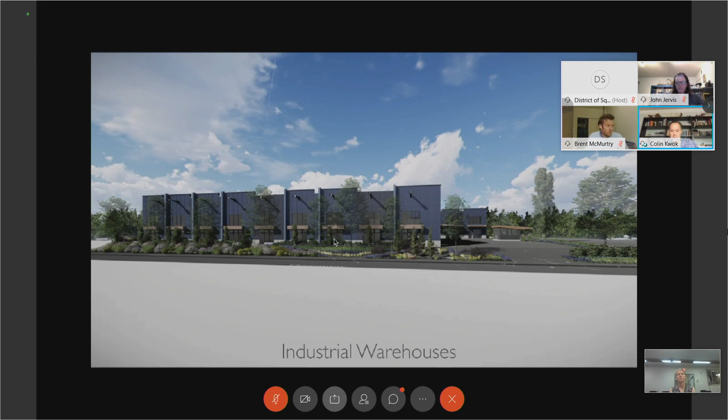So this is the view from the street. We'll come back to this one later, but this is a streetscape showing our building as well as the rest of the street as it is right now.

We have articulated the front facade a little more to give it more relief, and changed up the signage. We will talk about that in a bit too.

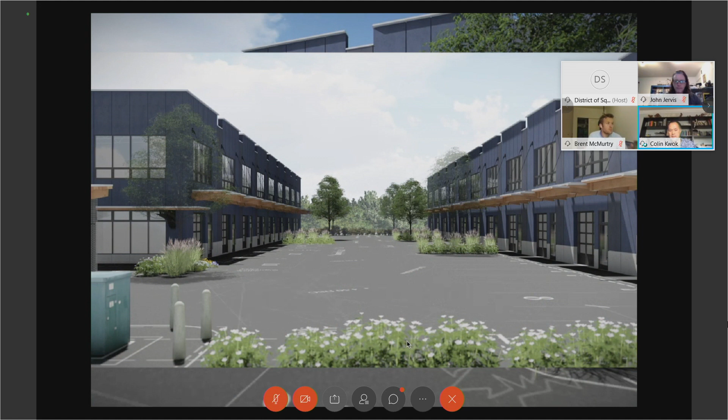We have redesigned the canopies. They are a little higher, a little lighter, and there are a few other things we'll also talk about in a minute.

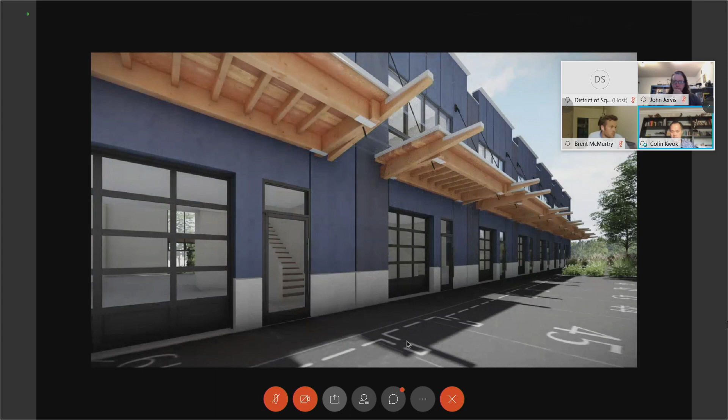You may have noticed the color of the building has changed from gray to dark blue. This is our wonderful garbage shack, with bicycle parking behind it.

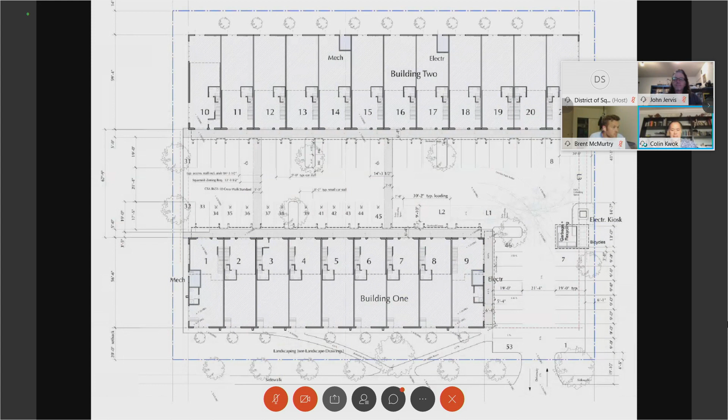These are the lots in question. We also have civil drawings and landscaping, but we'll wait for Travis to present that. We don't have to go through all the drawings unless you have anything specific you need to look at. So let me get out of this, and we're over here.

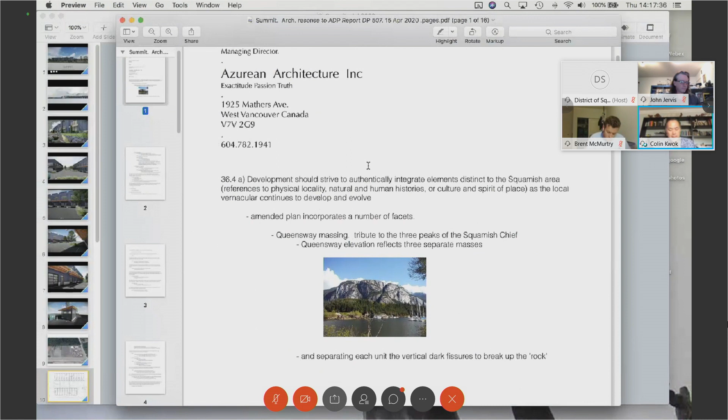We'll start with the form and character of what we were trying to do. We had to relook at the massing, and we've tried to create an abstract representation of the Squamish Chief, in the sense that there are three main elements to the mountain, three little summits, with gaps in between them. We did change the name of the project.

I'll just talk about that for a second. Art Space seemed to be confusing a lot of people, so we've just changed it to Summit Industrial Park.

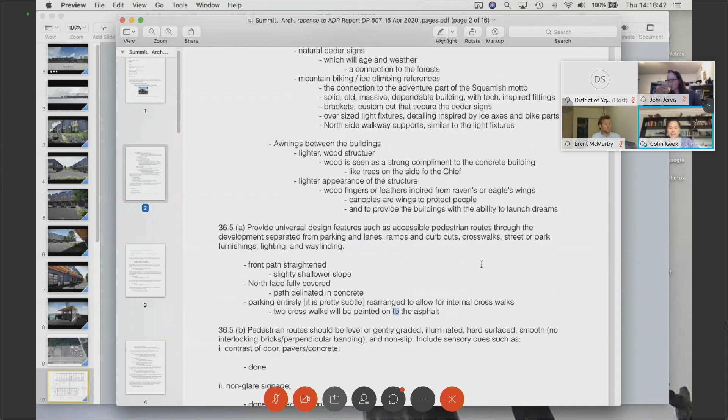This document, I won't read it in detail, but we were looking at both darker colors as well as some natural cedar signs. There are some references to the adventure part of Squamish, ice climbing equipment, climbing axes, bicycle bits and things like that. Hopefully that will read in the lights and the structure we're doing to the building.

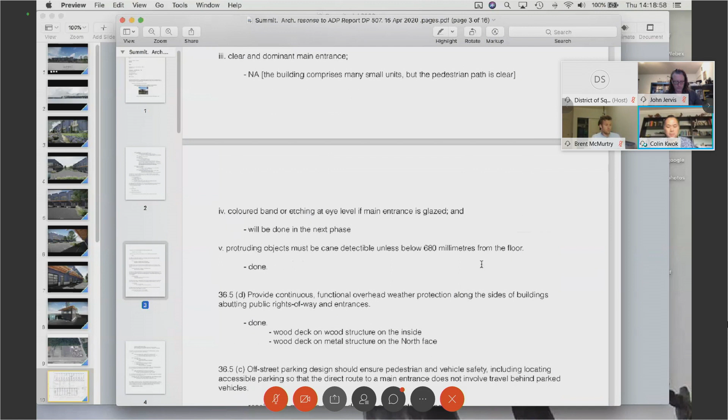Most of the stuff is covered in the notes you got for the minutes. The one thing we did do was redesign the wood awnings so they are a little bit lighter, as was commented before, and we've changed the signage so it's not on banners anymore.

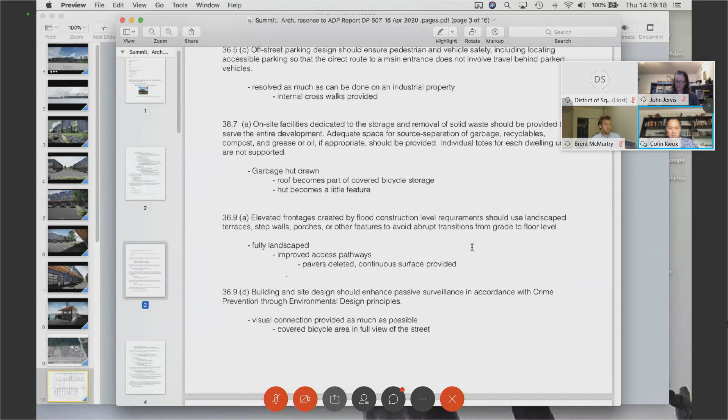We decided that's probably a good decision because managing strata councils is very complicated in terms of making sure everybody does something that, in the deeper future, makes all the signage look good.

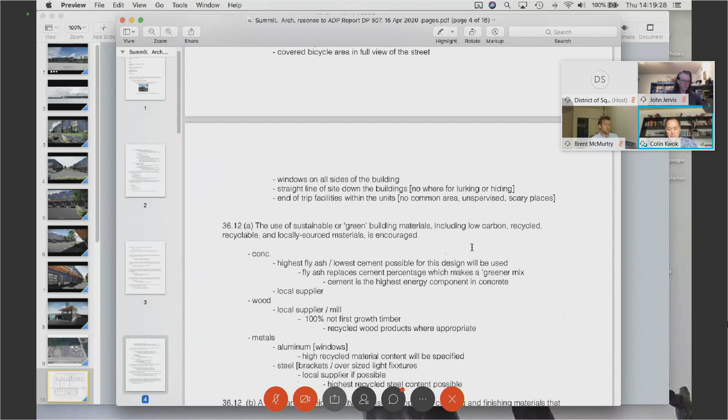And then we went through all the sustainable stuff, as well as the other notes around the Development Permit Area 3 guidelines.

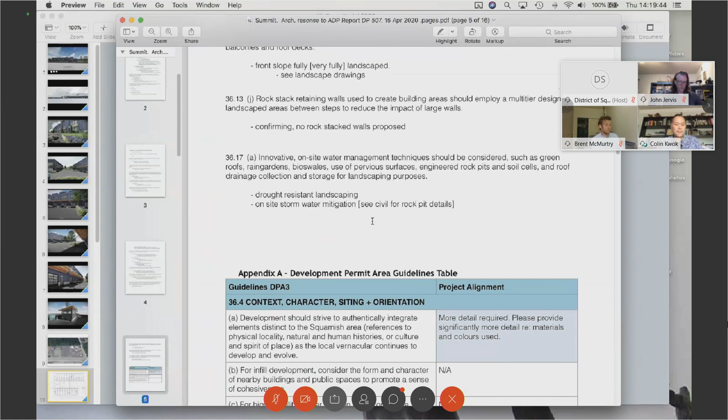Let's get back to this image. I can zoom in on my computer, which helps, just to give a little tour of what we're doing.

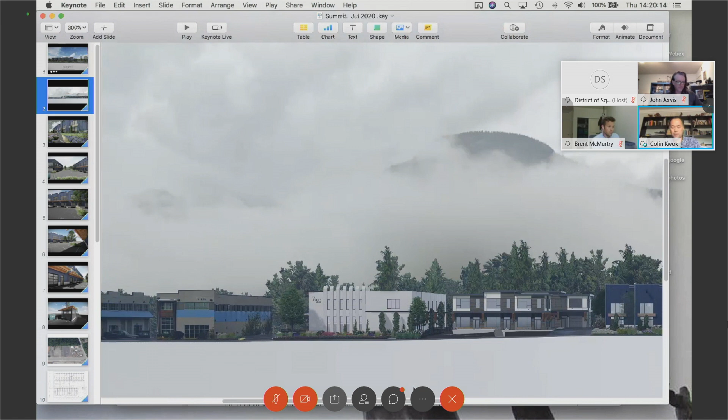So these are the existing buildings to the south of our site. Perhaps you recognize them. There's one project here, another one there, and this is the Seven Skies project, which we presented a couple months ago. This is our neighbor immediately between us, and then this is our project here.

And this is the Quonset hut next door to us, and a bunch of shipping containers.

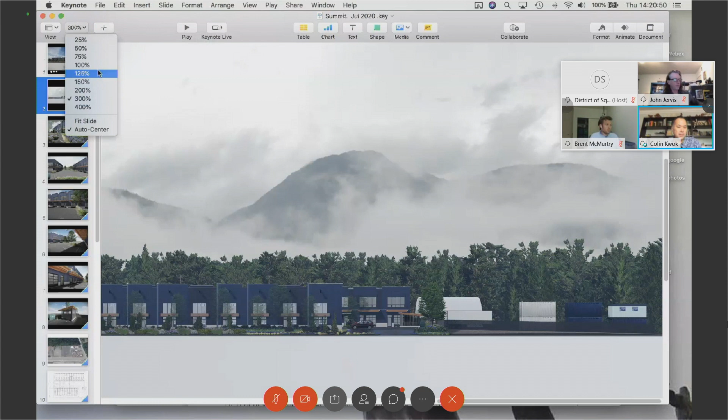We hope that what we're trying to do is meet the goals of the development permit area guidelines of Squamish for the continuing evolution of the area, and that the buildings will be something that ages well and lasts into the future, not something immediately dated.

There's a couple of other points we'll probably get into during the question period. One of the big concerns raised, both by Jessie and others, was the permeability of our paved area. We've had discussions with our civil engineer, and I'll get to the civil drawing here.

One advantage of doing it this way, as opposed to having the entire parking lot permeable, is that this is an industrial park, and we don't know what people are going to be doing in and around their units. Anything that spills on the ground, we don't necessarily want it immediately absorbed where it can't be cleaned up. So this at least gives an ability to clean up anything that spills on the parking lot before it reaches the catch basins and gets into the filtration tank.

So that was the only thing that might not be fully clear, but I'm sure there will be other questions that come up, and we'll go from there.

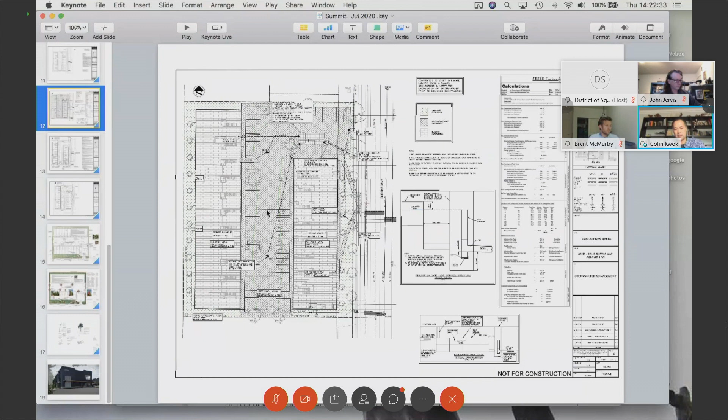I will turn it over to Travis to talk about landscaping for a minute. What we have done, which I'm not sure whether anybody has had a chance to look at in detail, is straighten out and widen the accessible crosswalks, as well as move the tree islands to accommodate the rearranging of all the parking.

We have tidied up the loading spaces so that there is room on the ends of them for maneuvering as well as for unloading and loading. One thing I like about this arrangement is that L1 and L2 are right next to each other, so if any vehicle is larger than the 30-foot loading space, it can be accommodated if both spaces are booked for unloading or special loading.

Other than that, the other major thing we did was include a shower in each unit, which is the end-of-trip facility for people who will be cycling, as well as a Class A lock-up hole bike storage underneath the stairs of each unit.

As it wasn't entirely clear, I just wanted to clarify that each one of these units is going to be sold as one thing. So they are one tenant, and the upstairs and downstairs will be the same entity.

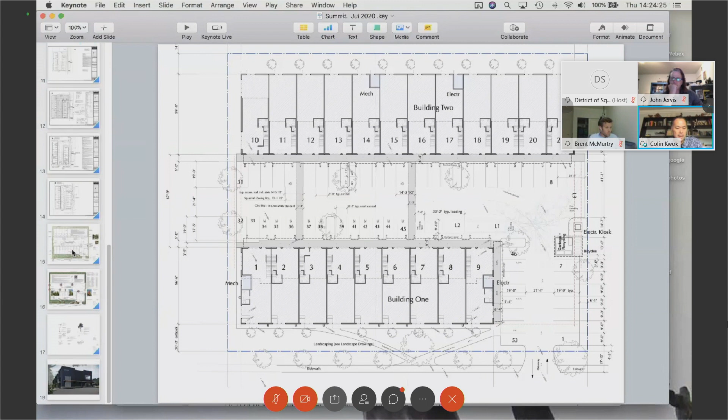Hi, Travis here. Thanks for having me. Can everyone hear me? I hear you. Good.

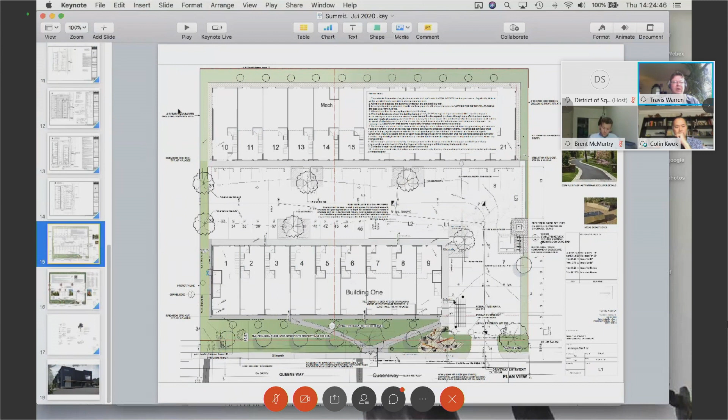Just to confirm what Colin has explained about the pathway from your recommendations, I've looked at the Rick Hansen Foundation Universal Design recommendations, as well as using the BC Building Access Handbook.

This is not a ramp, it's a pathway, but it does exceed what we had presented before. The slope is slightly lower than we had. We've increased the size of the landings so that they exceed the 1.5 meter suggested, and they're widened as well. One of them is a completely straight pathway that reaches the upper and lower landing, and the other has just the slightest of gentle curve to work with the landscape.

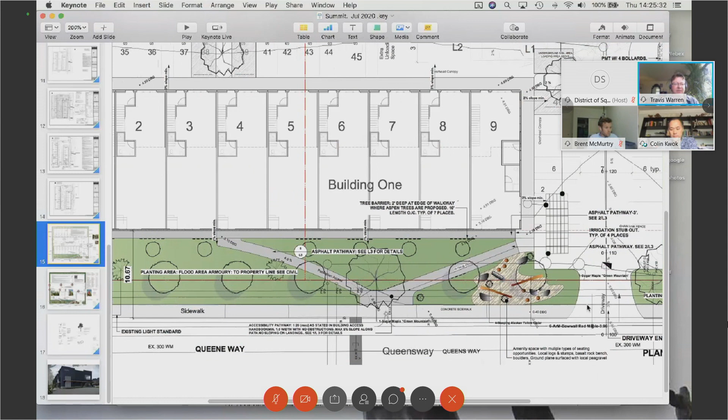In this frontage area of landscape, we did make some small adjustments, mainly with the front street trees. We moved them closer to the building to stay as far away as we could from the site services and civil, and now the trunks are within the property line.

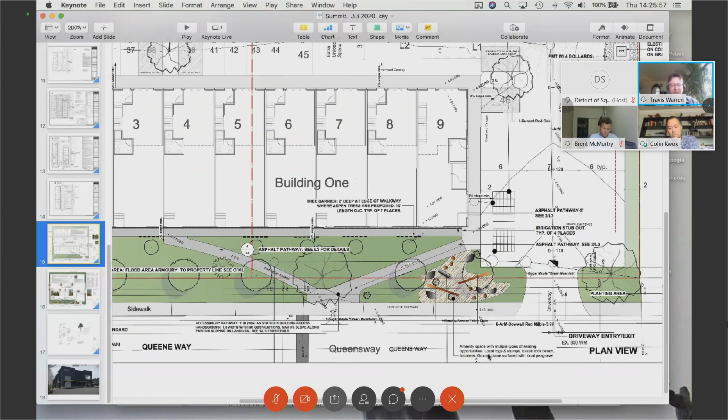Another change we made is with the bike spaces themselves. Based on your recommendations, we used a new model so that there are 2 touch points, and we increased the spaces by 2.

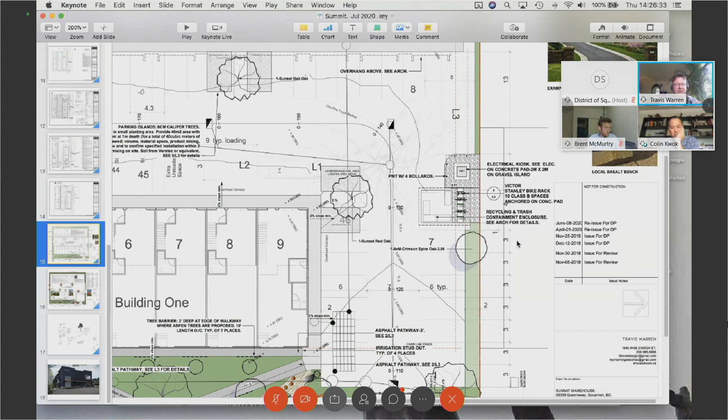And I think, as Colin said, a lot of stuff was rearranging and getting fine details in the planting plan, as well as the movements of the parking islands to make sure we had accessible pathways throughout the site. I think I could just leave it right there for now and wait for questions and comments.

Is that everything? Yeah, that's everything. Okay, wonderful.

Thank you. Okay, well, with the questions that we had in mind from last meeting, which is the guidelines, we've got a list of which guidelines we were especially curious about from last meeting. I'll hand over to the panel to ask questions, and hopefully we'll stick within those groupings of concerns. I will start with Carlos today, if you're ready.

With questions, I'm ready, but I don't have any questions, John. Okay, that's fair enough. Brent would be next.

Thanks, John. The only question I had was, what is the width of the asphalt pathway along Queensway? The width of the asphalt is 1.8 meters. Okay, and that's the section that runs along the front of the building, right? Yeah, street side of the building. Oh, give me one moment.

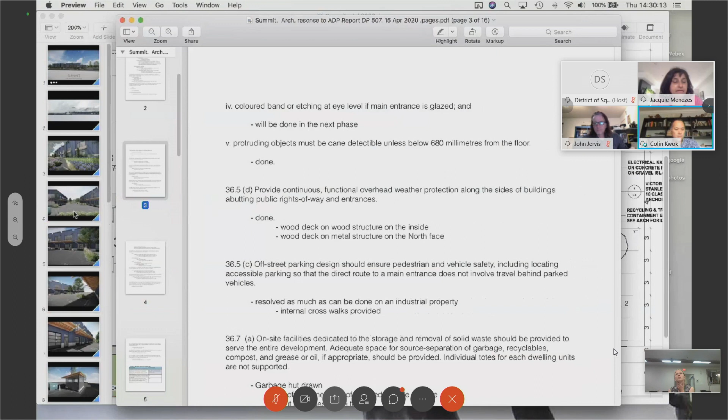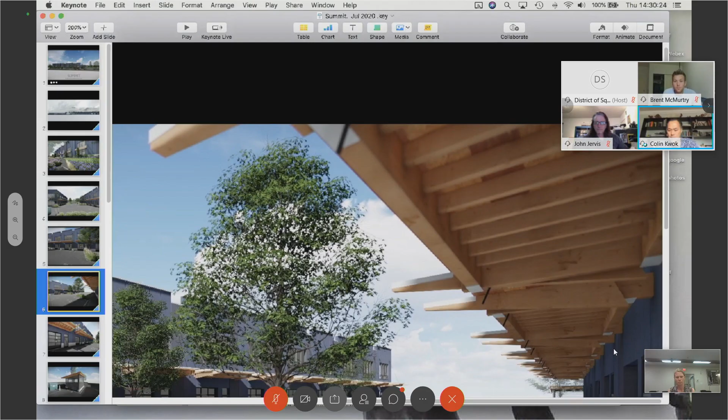Here we go, can everybody see that? Yes, I can. So what we did previously was that this main support timber was below the structure of the joist rather than within the depth of it, so it was much bulkier. What we did was, if you look on our elevations, you can see there's a sign panel going to be above the garage doors, where my arrow is pointing right now. So we lifted the whole canopy, and it feels a little bit lighter.

We also extended some decorative stringers on the outside to define the unit and also to give it a bit more of a feel, inspired by the wings of ravens and eagles and things like that. And then in between these canopies, that will be the part that's infilled with glass.

So it was fully rethought about. I think the comment last time was somebody thought it just looked a little too chunky, and it was lower and did feel a bit heavier. So yeah, I hope that addresses that. Okay, thank you.

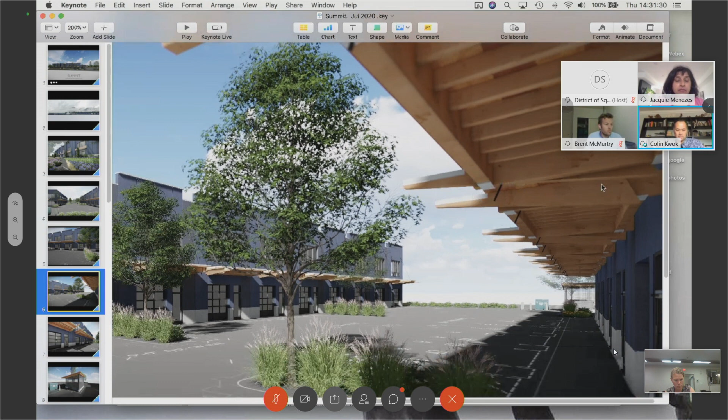And the signage from the street to the facility, I can't remember, we asked that it be addressed. I don't think you showed us anything in your presentation. If you can bear with me for 2 seconds, I will call up the drawing.

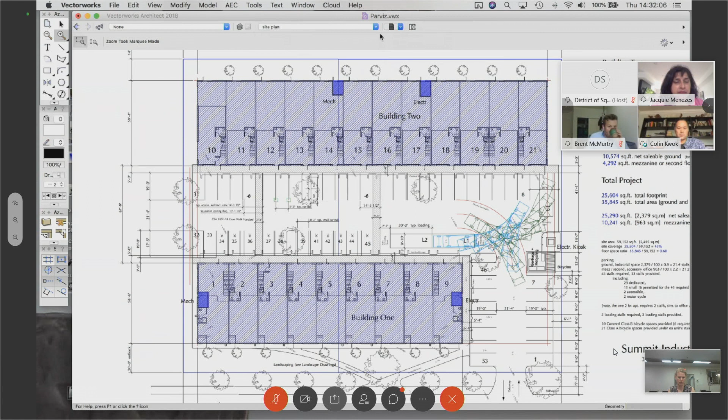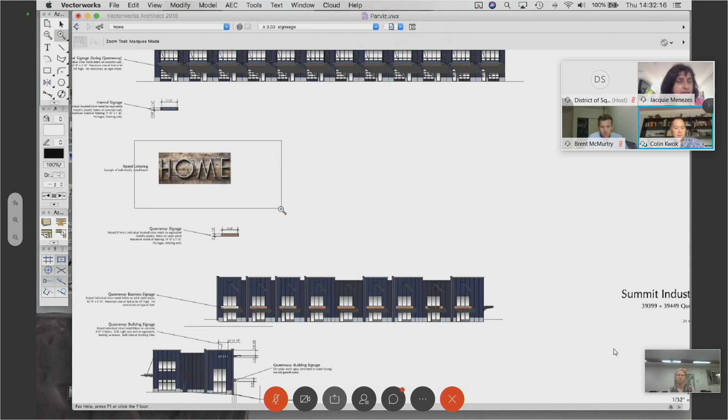Sorry about this. You can, right here, signage. We are proposing to have the signage, which will not be on banners, but will be metal letters that are raised above a piece of wood. And a large wood piece would be right on the front of the unit.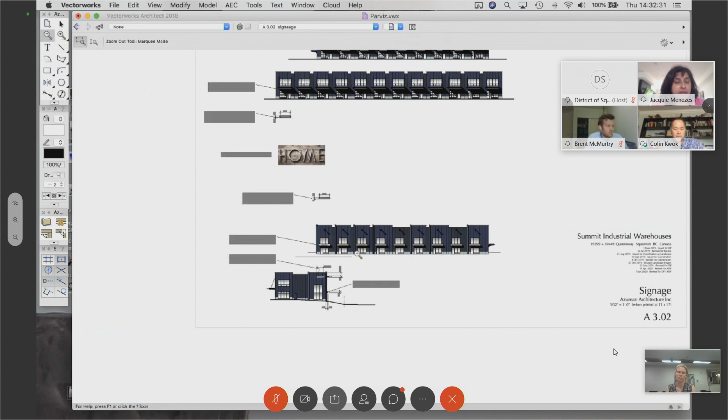So here would be, sorry, go the wrong way. So it would be, and that relates to that piece we saw on the rendering. Where am I? Here we go. This chunk of wood right here. It's a little bit lower down, when the trees grow up a bit it will provide a canopy that you can still see the signage from the roads, and hopefully it'll be more legible and make a bit more sense than putting it on a banner.

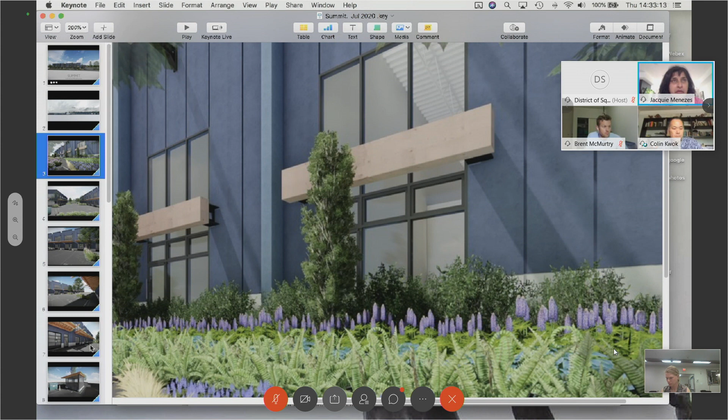Great, thank you. Sorry, I meant kind of the wayfinding signage from the access street, which is Government Road, I believe, into the whole space. So this was where, wayfinding or the address? Yeah, the one that's just kind of at the entrance driveway.

Yes, that would be the numbers on the side of the building. Okay, and I think there's nothing to indicate what's there. Pardon me? Nothing to indicate what's there. So what if this business solely, what if somebody opens up, I don't know, an artisanal space there, and somebody's trying to find it? Is there going to be something at the driveway to help them know that it's in this spot?

I think it was a decision made with the team that we can't really put any kind of signage by the road because of the flood hazard type, to impede the flow of water. And there are 21 units, so that's a lot of people if there's 21 separate businesses to put on another side of the building, which I think would be either too big and too much like a marquee. So maybe it's a little bit more subtle. We do live in a digital age where hopefully people will be able to get there by Google and things like that. So that was the thinking behind just having the numbers on the side of the building. So they're on both the north side as well as the south side.

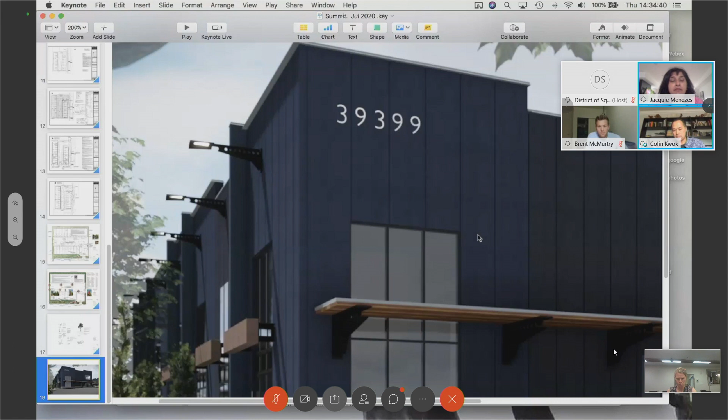Just because you asked about the canopies, we also have a slightly different canopy on the north side of this building to protect the walkway that walks around the sides to get to the back of the building. And that's an addition from last time.

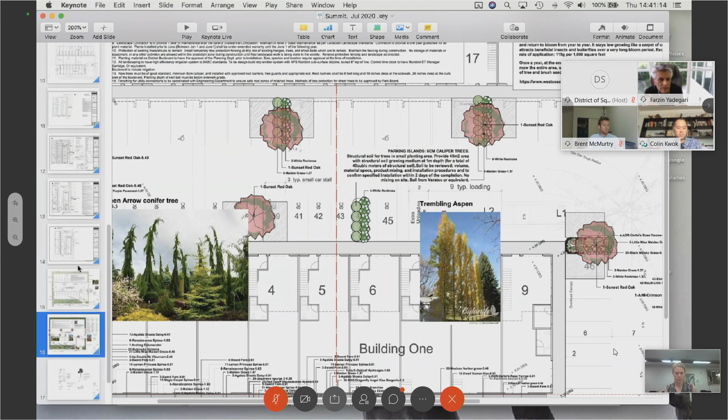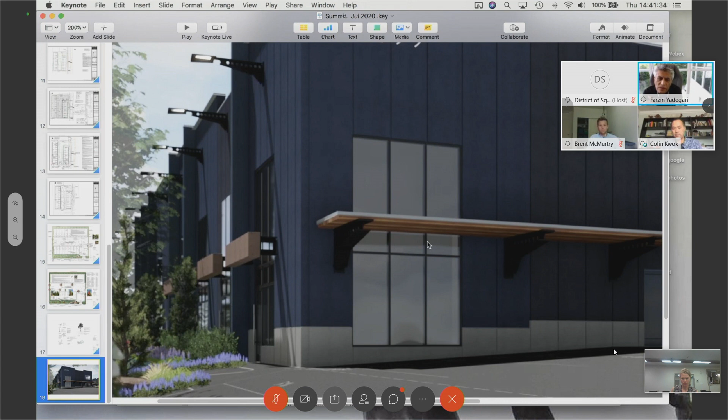So if you can see, these are the big lights on the front here. So they will be lighting the front. And then lights on the back side, we didn't show those because they're underneath the canopy. And those lights will light the signage as well? Yes, they will light the entire front area of the building. Okay, thank you, John, no more questions.

Okay, thank you, Farzin. I have no questions at this point, so I think we will go straight into the round of comments. Unless anyone has any last questions. No? Okay, then we'll start with Colin for comments.

Thank you for the presentation. I think the building as proposed is improved from the last version. I had my little rant about the standards we're putting on light industrial buildings and their effects on cost, so I've said it once, I won't say it again. I appreciate the efforts put into this one, and I'll personally be happy to support this.

Okay, thanks Colin. Brent is next. Thanks for the presentation. Unfortunately I wasn't at the previous presentation, but from the sounds of things, you've met most of the comments and concerns people had, so I'll leave my comments at that. Looks pretty good to me. Thanks.

Okay, thanks Brent. Jacquie is next for comments. Thank you very much for the presentation, and thank you for addressing our concerns from the previous meeting. It's nice to see the aesthetic has gone from gray to blue, and some of the other awnings and items on the facade have been addressed. So thank you very much, and those are my only comments.

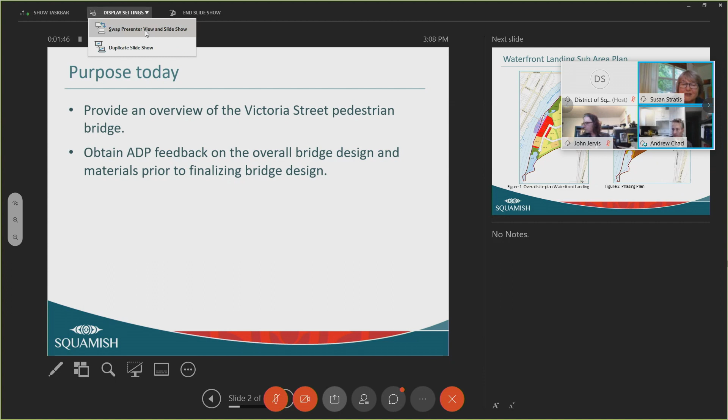Next slide, Andrew. We're going to very briefly give you an overview of the pedestrian bridge, and we're hoping to focus really on the bridge design, bridge materials, and lighting, so that the bridge design team can then work on finalizing the design. It was a request of council that the bridge come forward to the advisory design panel, and I recognize this isn't your typical project. Next slide.

Just very briefly to show where we are: figure 1 on the left shows the overall Waterfront Landing site, with the Mamquam Blind Channel separating Waterfront Landing from the downtown. The pedestrian bridge is shown as a line in the Figure 2 phasing plan, and it is required prior to the final occupancy permit for Phase 2A. Both Phase 1 and 2 are under construction now, so getting the bridge design finalized is becoming fairly important. Next slide, please.

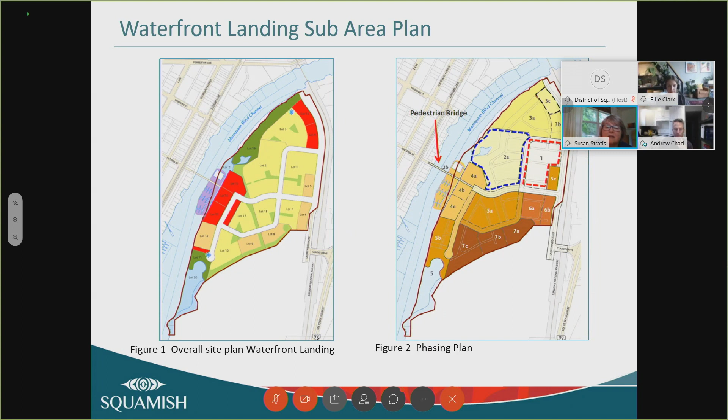One of my last comments is just how important this pedestrian bridge is as a piece of transportation infrastructure. Bosa developers have provided two main pieces of infrastructure: one is the rail crossing at Clarke Drive, which you've mostly seen driving north towards Squamish, and that has been constructed. The pedestrian bridge is the second major piece, linking Waterfront Landing to the downtown, but it also provides an important connection for people who live in other neighborhoods such as Valleycliffe and areas further east of the Waterfront Landing site. The bridge construction costs are being paid for by Bosa as a community amenity. Once operational, it will become a piece of district infrastructure, with operation costs borne by the district. Next slide, please.

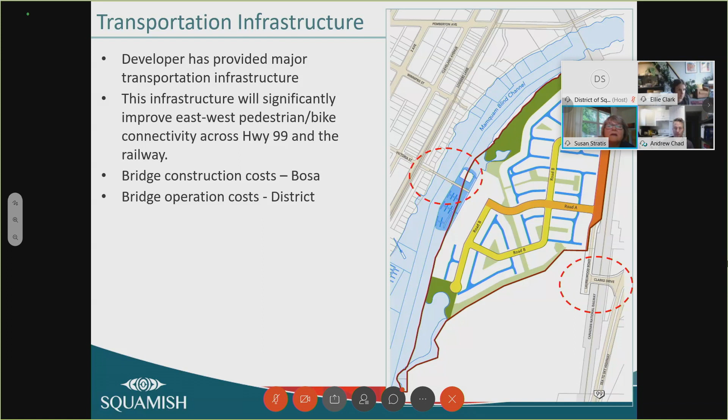Over the past two to three years, the applicants have been going through a fairly detailed approval process with Transport Canada, and the approval was granted in April of this year. That approval includes a lot of details regarding maintaining navigation in the Mamquam Blind Channel and how the operation of the bridge will function and be staffed to keep navigation possible.

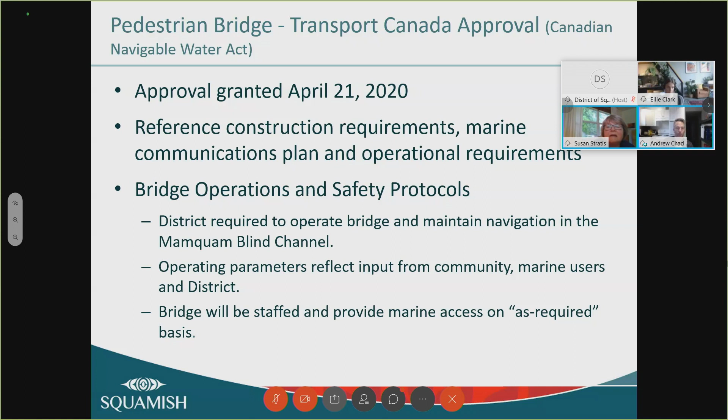An important part of the approvals are the operating schedules, which vary by season. There's a winter and summer operating season, with winter and summer operating times shown on the slide, that the applicant has to adhere to. The concept is that this will be done for the first year to see how the use of the bridge is actually working out, and then there will probably be some reconsideration of these operating parameters and revising them as need be.

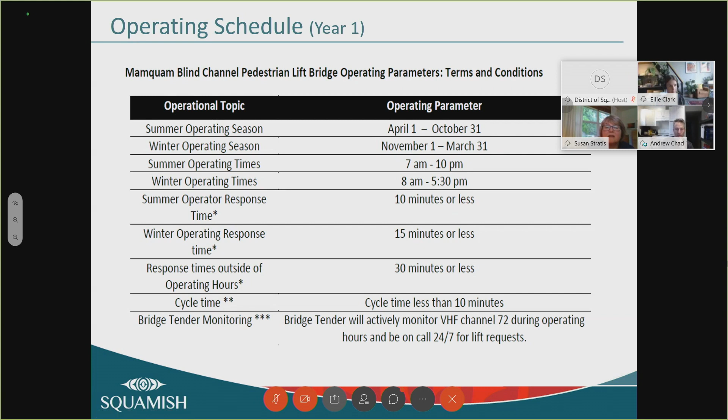The next steps in the process are for the design team to finish the detailed structural, mechanical, electrical, and operational design. This needs to be coordinated with flood protection works and park design happening on the downtown side of the project. The district needs to issue an environmental DP for the bridge abutments on the waterfront landing side, and some DFO approvals are also required, with those applications underway. Construction is intended to start next summer, 2021, and be completed in summer 2022. That's the end of my slides. If we could switch over to the design team, I will leave this to them.

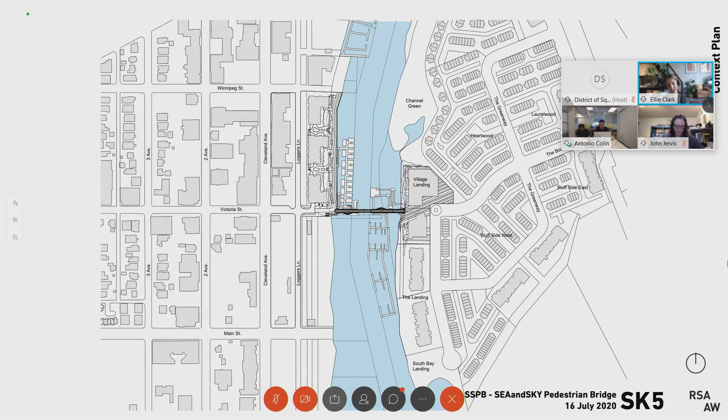The design life of the bridge is 75 years, and it is being designed for a 100-year sea level rise to ensure resilience against climate change.

So the bridge will be about 100 metres long and a minimum of 4 metres wide. This width has been determined to be suitable for multi-use paths for pedestrians and cyclists in both directions.

At the west landing, the multi-use path will be integrated into the landscaping of the new Sirocco development to the north and coordinated with the new district Squamish Xwu'nekw Park design to the south. On the east side, the bridge will land at the centralised plaza of both new developments, which is where the amenity building and commercial properties are located.

From this plan, you can see that we have a fairly congested site with constraints including Sirocco's proposed float home development, which is part of their big development to the north, and the potential requirement to provide access below the bridge deck to a public floating dock. We have Bosa's proposed marina on the east side of the channel, and perhaps most importantly, we have the navigation channel in the middle.

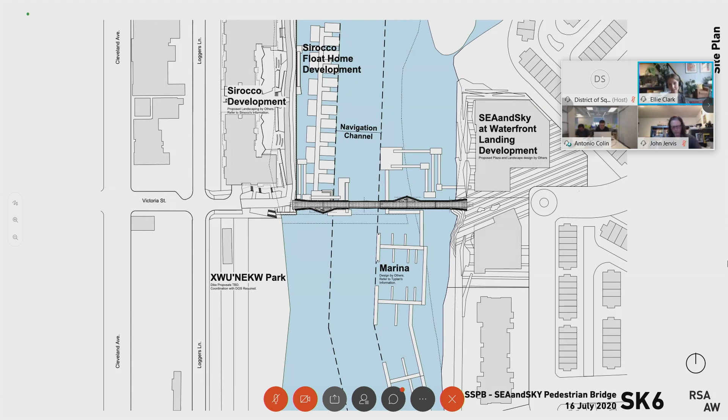That brings us to the key design feature of this bridge, which is that it must operate to provide a clear 14.5 metre gap for boat traffic to pass through within a tight cycle time of 10 minutes set out by Transport Canada. These requirements have strongly influenced the overall design of the bridge.

When we first came on board with the project, a preliminary design had been proposed, and this was for a single drawbridge, so a 14.5 metre arm stabilised by a 7.5 metre tall column at the pivot point with tension cables. This design was not approved by the district and was deemed to be a bit too futuristic.

Following this, some guidance was given by the district on what they would prefer to see, and comments included paying homage to the industrial heritage of the site. Antonio will speak more to this a bit later on.

During the design development, we have considered various options for the movable spans, including the single draw as originally proposed. We've looked at a sliding option, a pivoting option, even a floating option, and ultimately this is where we have landed: a double drawbridge powered by hydraulic pistons.

The double draw option allows shorter cantilever spans, which saves on structural demand, materials and costs. Another benefit is it allows reduced cycle time, and it is also beneficial with other challenges we have on the site, including high wind speeds, because you can imagine having a 14.5 metre arm up in the air with high wind speeds is very challenging.

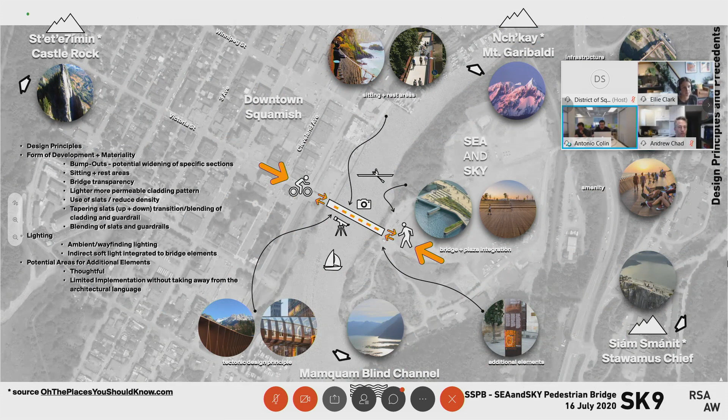We have analyzed dozens of precedents to research what makes a meaningful experience, from materials to shapes, finding the references that explain how the bridge not only connects point A to B, but itself with its context.

We found opportunities to make space within the organization of the bridge for user activity, supported by public infrastructure, ranging from benches to viewing platforms, to the integration of cultural elements and interpretive signage. These elements will be developed in future phases.

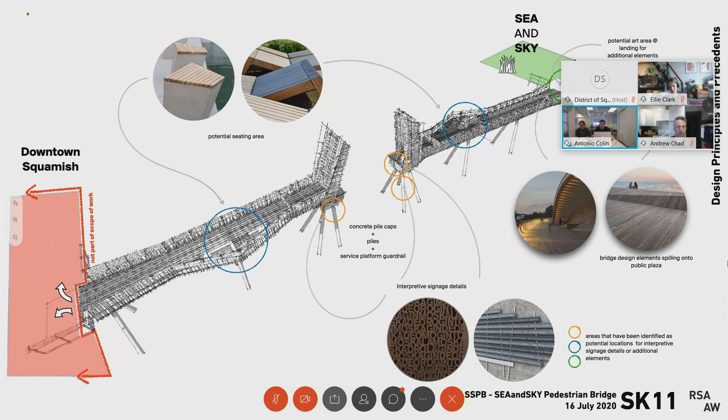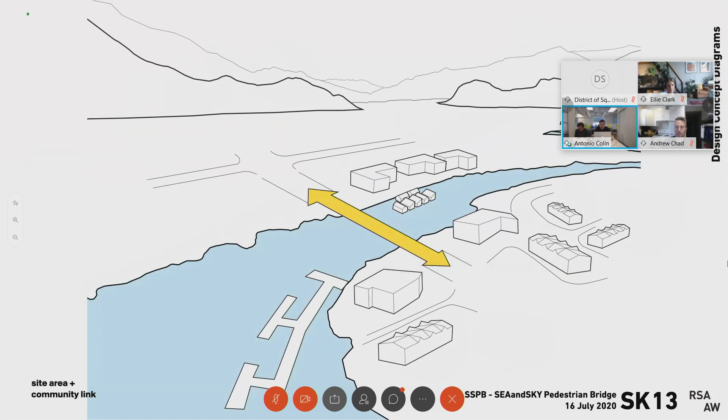Before jumping into showing you images of the bridge, we'll talk about the rationale that generated it. Where we didn't have a connection and users were forced to go around, now there is one. This element of public infrastructure enables a new circulation dynamic which connects the community.

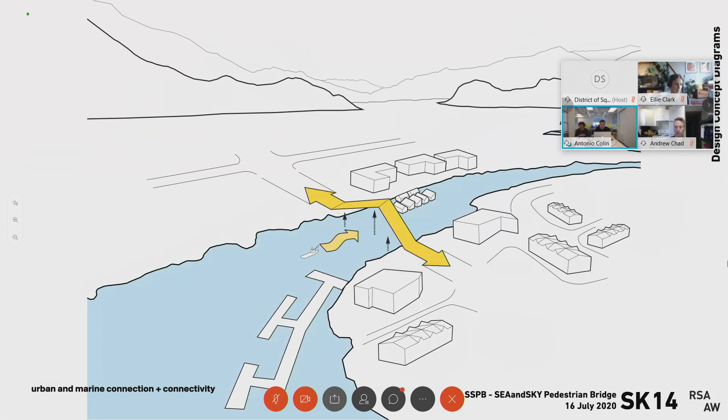Circulation is consistent, allowing traffic flow in the body of water that expands for paddlers and rowers. The double draw articulation is added for navigation of sailboats or larger vessels.

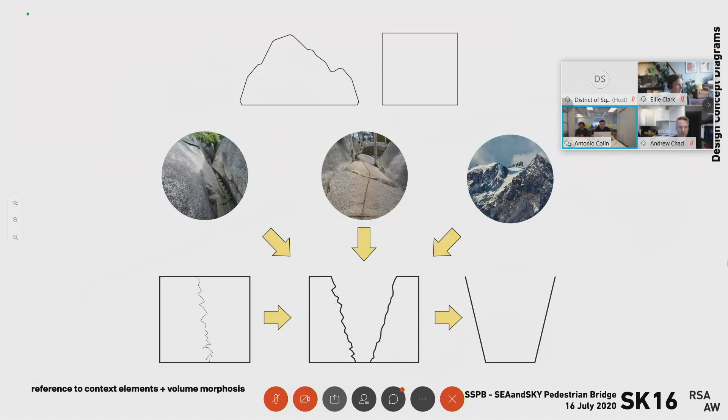All of this is function; we'll go back to form. How does a bridge become a bridge of Squamish? Like the geological formation of a rock that has been cleft into, so are the walls of the corridor of the bridge - by recognizing surrounding elements, with identified potential views along the bridge.

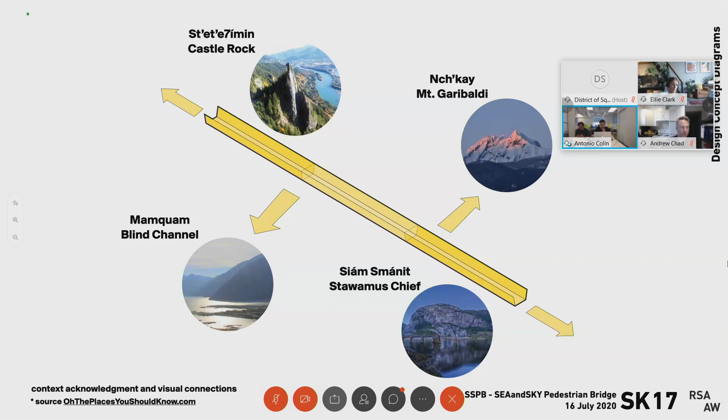Respecting the 4-meter width of this corridor, lookouts are strategically located to enable pedestrians to have a moment of respite and enjoy the views.

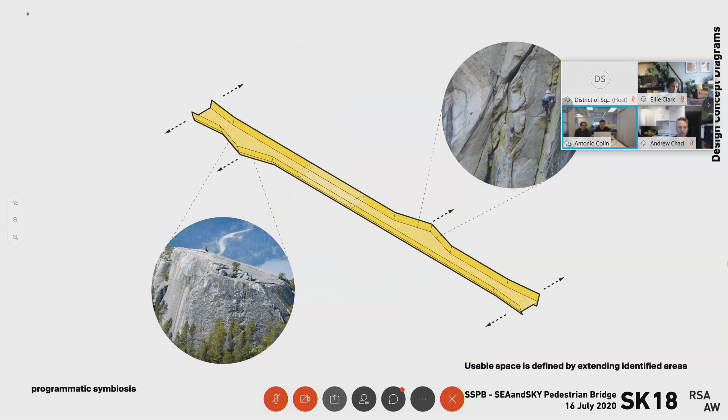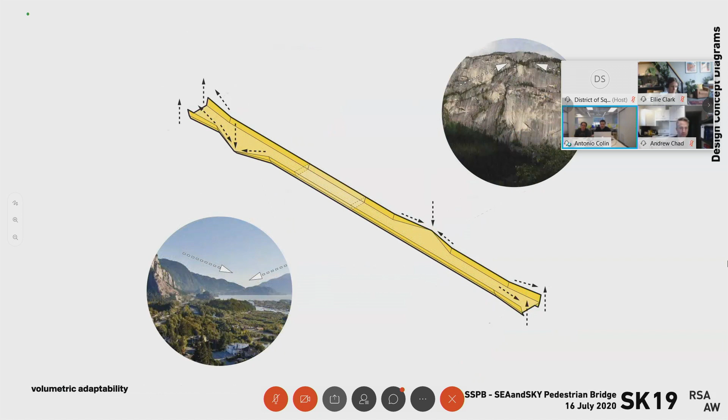To accentuate these moments where views are promoted, the skin of the bridge drops while it runs up at the point of entry, enhancing the sense of a gateway.

The exterior cladding or skin consists of vertical steel slabs that evoke the essence of the West Coast rainforest. The slabs move up and down in a system pattern. Cladding then adopts context elements and becomes a lush vertical pattern, fading towards the seating areas, maximizing view opportunities.

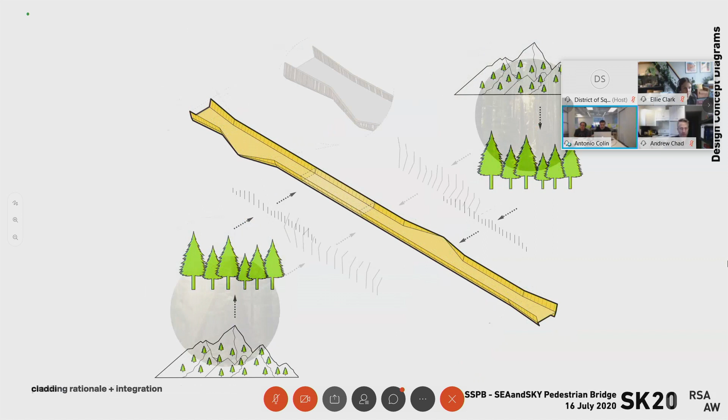Slabs unfold and crank, evoking the layering of the forest, a deliberate abstraction of the contextual surroundings.

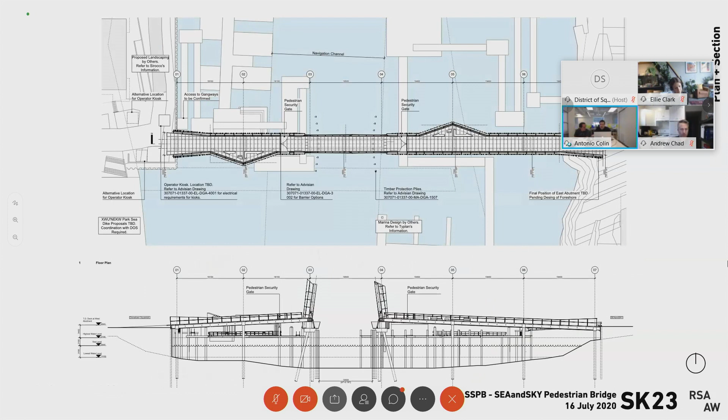As mentioned, the bridge spans across the Mamquam Blind Channel with a series of programmed landscape areas and activity zones, providing opportunities for the community to engage. It aims at becoming not just a passage, but a destination, a moment for the two banks of the channel to converge.

The bridge offers layers of programmatic activity. It presents an extension of the landscape, an amenity for the community, a place for users to explore and provide a different experience, a sense of place. The bridge is designed to be a coherent connection point between the Sea and Sky development and downtown Squamish.

A generous extension of the platform allows for additional programmatic functions for pedestrians, as well as flexibility for a wide range of potential uses, such as a waiting area for users while the bridge is in operation.

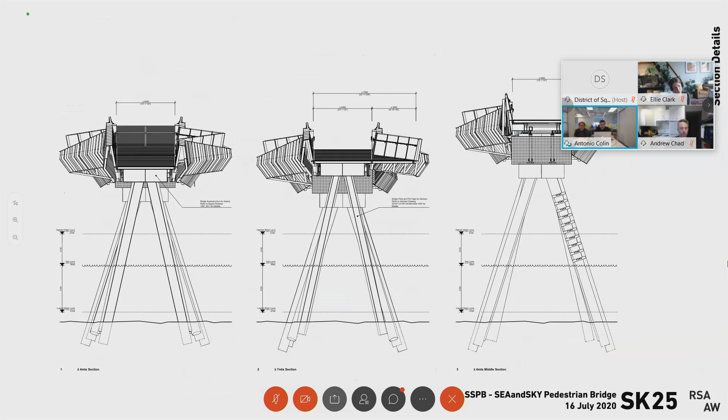The bridge is conceived as fully compliant and accessible. This means that wheelchairs and strollers alike, just like bicycles and any footwork, will be able to use the bridge with utmost ease. The railings also establish safety requirements as per code.

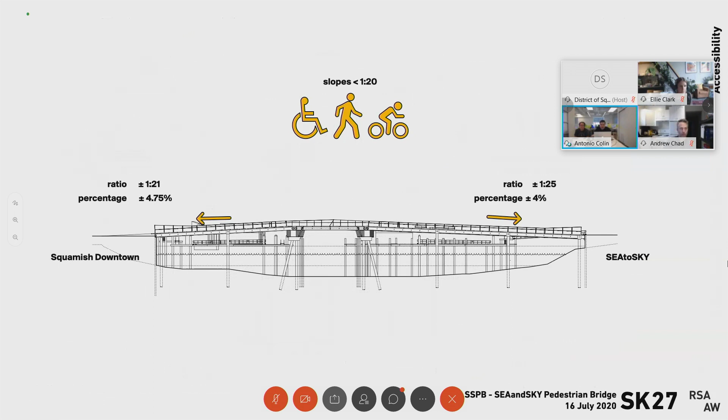Adverse weather can cause slippery conditions. To avoid the situation, several options are available, among them a porous material to lessen the buildup of snow and ice. The proposed grating product satisfies both vehicle loading and pedestrian comfort requirements.

The close spacing of the bearing bars offers a pedestrian-friendly opening, meeting ADA guidelines for slip resistance. It allows easy access to wheelchair and high-heel traffic while being bicycle-friendly.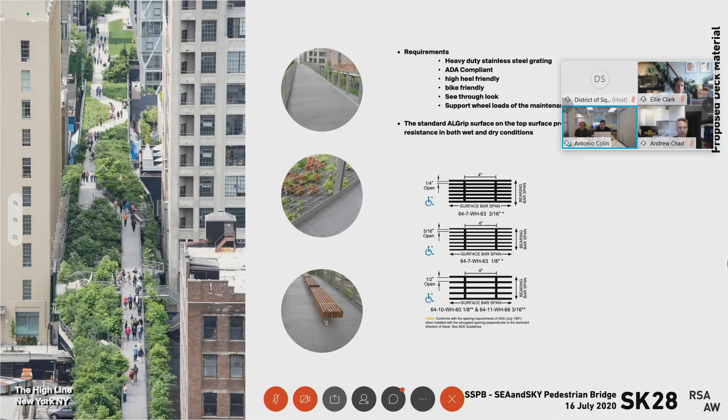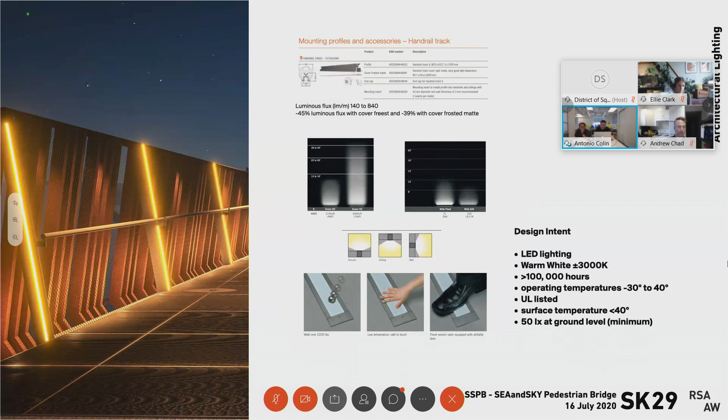Weathering steel provides a vibrant and warm color texture to complement the surrounding elements. Steel net and railing infill has been chosen as a safety barrier because it combines functionality, aesthetic appeal, economical use of materials, and longevity. It emphasizes the architectural form without interfering with lines of sight and lighting concepts.

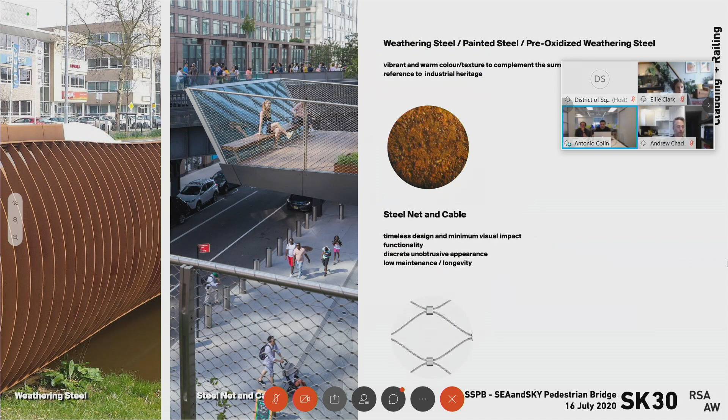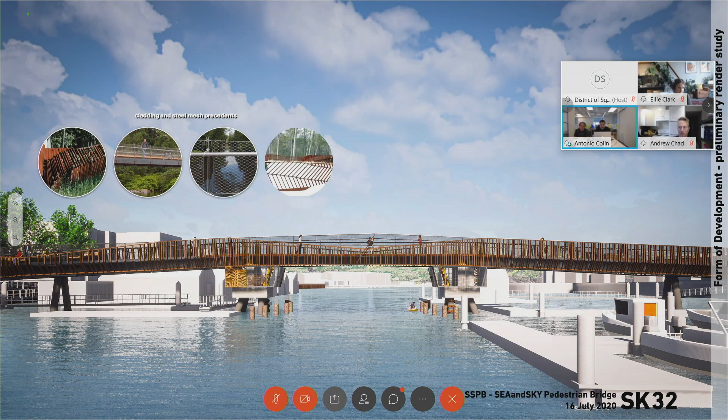The primary cladding element is seen here, allowing views as one is looking out of the bridge, head-on, while the secondary skin, consisting of a fine steel mesh, provides the needed safety barrier expected in a bridge. The two skin systems enable the mechanical articulation.

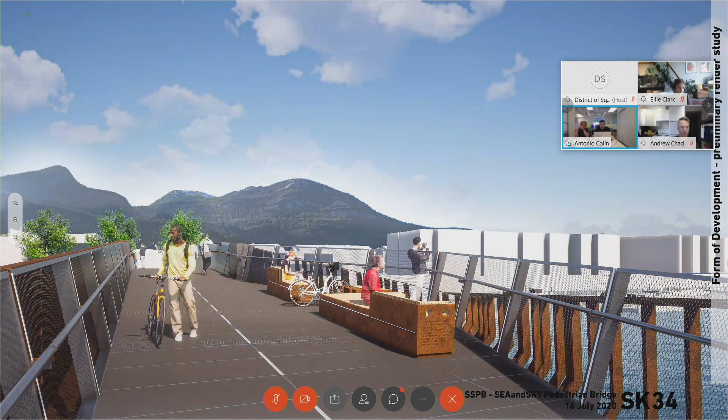Spaces are created as localized lookout points along the bridge, each with a unique connection to the channel and its surroundings. All systems at play can be appreciated in this view: benches, bike rest stops, interpretive signage, double skin cladding, and floor grating.

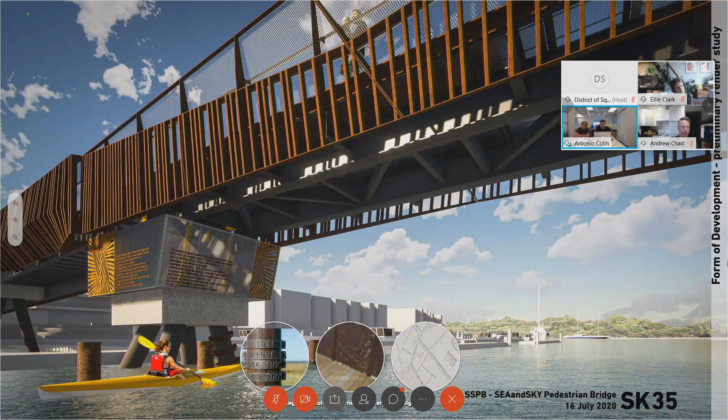A holistic approach will be taken in coordination with the authorities having jurisdiction to develop an effective path marking strategy. The marine views have been taken into consideration, incorporating unique elements that enhance the user experience.

The variations of the massing can be appreciated on this slide, where there's a subtle rhythm going up and down. The geometries of the bridge will inform the shapes of benches within, while keeping a safe distance from edges at all times.

The control room carries the same language as that of the bridge, as it follows the same materiality and geometric expression. Final location is still to be determined.

You can appreciate the bridge in full context in its closed position. Same view, now in open position. As we move to a different lighting condition, now at nighttime.

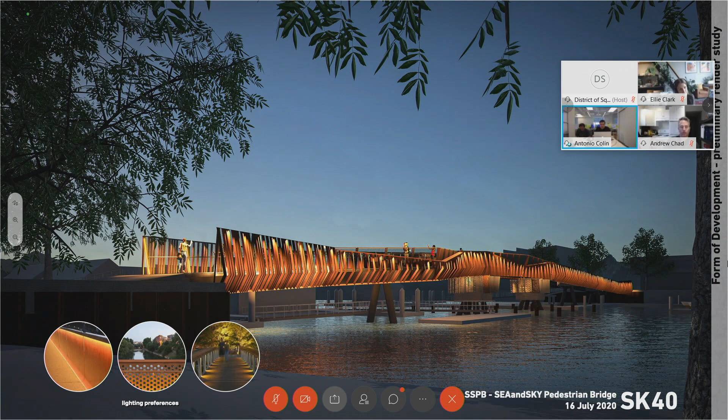Preliminary studies have been conducted to identify the location of lighting elements along the bridge, perimeter, and resting areas to provide sufficient light levels. The lighting strategy is to contain all light on the bridge while avoiding light pollution through the sky and water. The bridge slopes gently, allowing the necessary clearance to access the float home development on the west line or the east line.

All associated inspirations are a means to an end. Instead of using existing elements of the urban fabric, the approach is to insert a new condition, one that complements the uninvasive function of connecting point A to B. Thanks to the commitment of every party involved to date, we believe this bridge comes closer to accomplishing something representative for Squamish and its community.